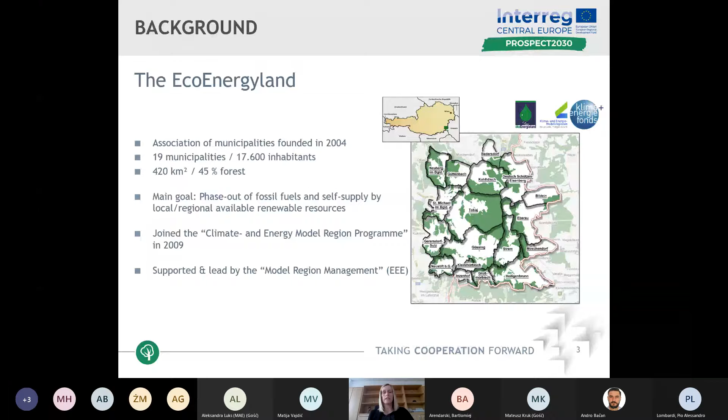Therefore, the municipalities also joined the so-called climate and energy model region program of the federal government in 2009, which enables them to have a finance basis for realizing some energy projects and also for the coordination of energy projects. And in this, we support the overall region and lead this as a model region management. And I am personally the model region manager. So I am coordinating all energy and energy efficiency related activities in those 19 municipalities.

What was our approach? Our approach was to divide the initiatives into three areas. So the municipal initiatives, the private initiatives, and the company initiatives. We saw the municipalities as a kind of role model, and we started with activities on municipal level, because there we have the most access, as we are coordinating all energy-related activities in our municipalities. Then we developed private initiatives, because we see the citizens as multipliers, and also company initiatives, because we see the company as a kind of, let's say, influencer, so that they want to boost their image by going green or using renewable energy resources for energy production.

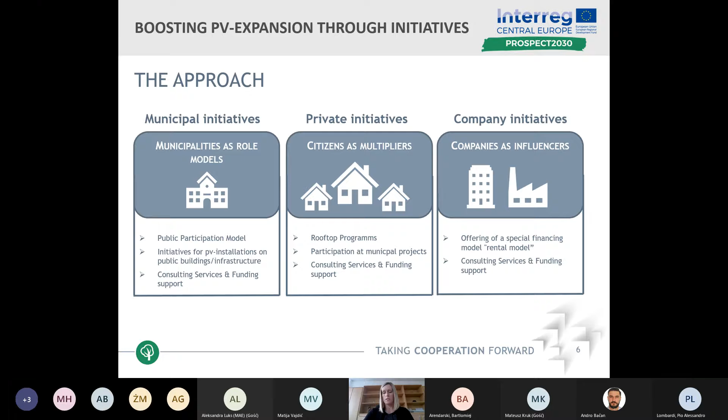On a company level, we developed a special financing model, a rental model, which I will also explain afterwards. And here again, we also offered consulting services and funding support. So now I want to go into a bit more detail on our municipal initiatives. This public participation model we have developed and realized.

So what was our idea behind it? The idea was that we wanted to create a new investment opportunity for citizens that promises a higher interest rate than the people would get on their bank passbook. We wanted to give private people the possibility to invest in renewable energy projects in their own municipality. For sure, we wanted to raise awareness in the field of photovoltaics. And we also wanted to enable our municipalities to realize PV plants without equity, so without the need to invest something from their own budget.

Okay, and how it works. The prerequisite for this model is to have a reasonable feed-in tariff available, so that you have a special period where you earn money selling green electricity from the PV plant. You need to have suitable public buildings for PV installation. You need somebody who is able to plan the PV plant and calculate the revenue and rates of return. And then you simply have to promote the possibility that citizens can invest in energy projects in their municipality.

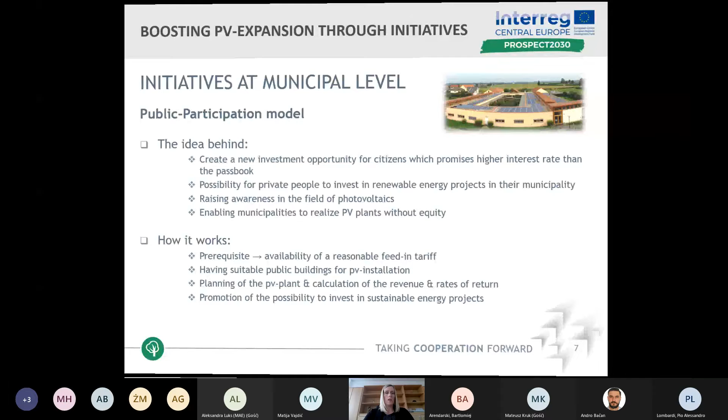How participation in this model works: the citizens of the municipality can participate by purchasing shares of the PV plant. We had the model that one share corresponds to about 1,000 euros. The participation on a legal basis was a kind of silent participation, which refers to the operation of the plant, and thus also to the profit and the loss, if there is some.

And the citizens had an annual profit advance of approximately 3 to 4%, which is much higher than they get at their bank. And after a period of 13 years, after the feed-in tariff ran out, they get the invested capital back. So it was a quite simple model. They can buy shares, then they receive 3 to 4% of their invested capital annually, and after the period of the feed-in tariff, they get their invested money back. And the plant goes directly into the ownership of the municipality.

So our model was quite successful. The result was that we realized public participation plants in 40%, nearly half, of the EcoEnergyland municipalities, with an overall capacity of 400 kilowatt peak. And the largest one, which you can see in the middle, has a size of 170 kilowatt peak and was built on a retirement and care center in the municipality of Strem.

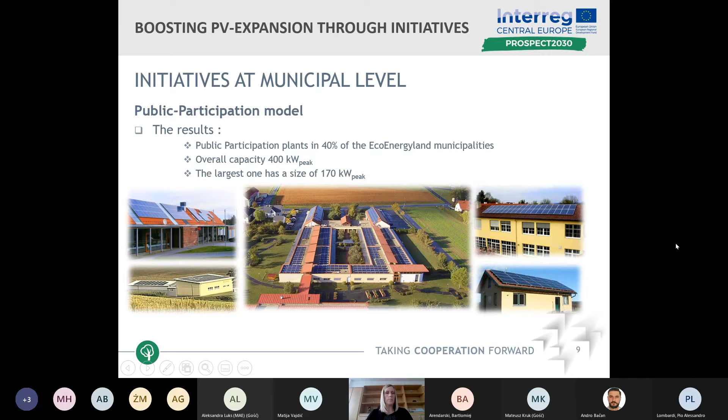Then the second initiative at municipal level was, on the one hand, again based on the public participation model. We said not only public buildings have potential for PV installation, but we also have other buildings and infrastructure in the public sector. We have biomass plants with rooftops, sewage sludge plants, pump stations, etc. And we wanted to promote the realization of PV plants on those buildings too. One model was, again, to offer this public participation model, which was already successful.

And the second model was that we discovered there is a possibility for municipalities to combine different funding, subsidies or grants. I think in 2013 or so, municipalities could get PV investment subsidies from the Austrian Climate and Energy Fund of 40% of the investment costs. And they could get investment allocation for such projects from the land government, Burgenland, with 50%. So overall they could receive grants of 90% of the investment costs. And this was again a booster for additional PV installations on public infrastructure.

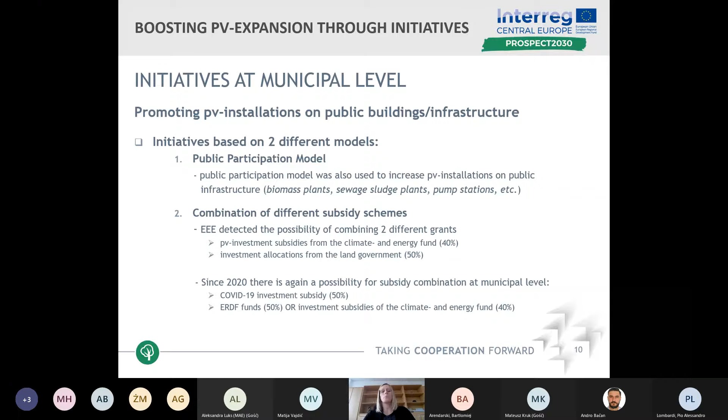And since 2020 we have a comparable situation again because of the COVID-19 crisis, because our municipalities get COVID-19 investment subsidies of 50% of the investment cost for such energy-related or efficiency projects. And there is also the possibility to apply for ERDF funds of 50% of the investment cost. So since 2020, municipalities can get their energy and efficiency projects 100% funded. Or if ERDF funds are no longer available, if the budget is used up, they can add a 40% subsidy from the Austrian Climate and Energy Fund to the COVID-19 investment subsidy. So they now have the possibility to get 100% or 90% of the investment costs.

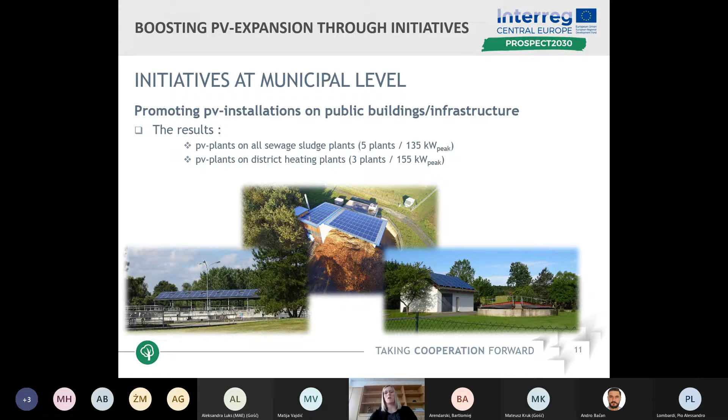What was the result of promoting those possibilities, let's say? We realized PV plants on all sewage sludge plants in our region. Overall, we have 5 plants and 135 kilowatt peak. And we have PV plants on 3 district heating plants with an overall capacity of 155 kilowatt peak. So this was mainly what we have done on municipal level.

Now I will come to what we have done on initiatives at private level. So we have developed a rooftop program, as I've already mentioned at the beginning. The idea behind it was that the companies in our region say, okay, people are increasingly buying different things on installments. They buy a washing machine on monthly rates, etc. So why not offer PV purchase on installment?

So we had the idea to create an offer for citizens to purchase PV plants for a monthly rate of about 50 euros. Okay, we say when we offer a PV plant, you get the PV plant and need to pay 50 euros for some years. We saw that this should be quite affordable for the people here. And it is more sympathetic for the people to pay 50 euros a month than to invest 7,000 or 8,000 euros into a plant.

So how this model works: we elaborated this installment purchase model, and we called it 50 rooftop program, because we thought, in a region with 19 municipalities, it should be possible to sell 50 PV plants. There we cooperated with a local installer and the regional bank, because for sure you need a bank that gives you the money for these plants. We decided on a plant size of 3.5 kilowatt peak. That should be a good size for a normal single family house, and we fixed the price for this size of plant with our installer.

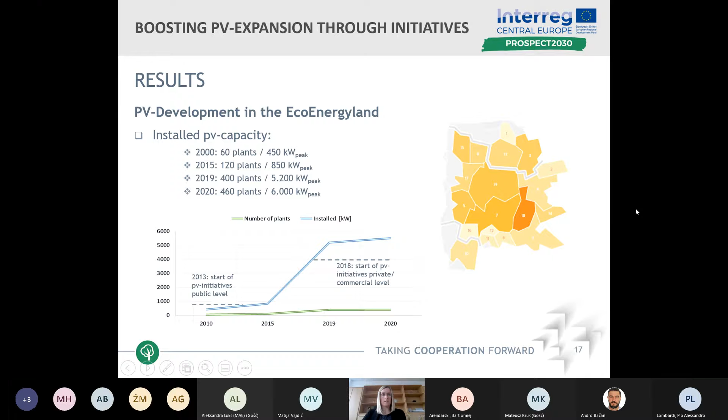So that was it from my side. I hope it was interesting for you what we've done at municipal, private and company level.

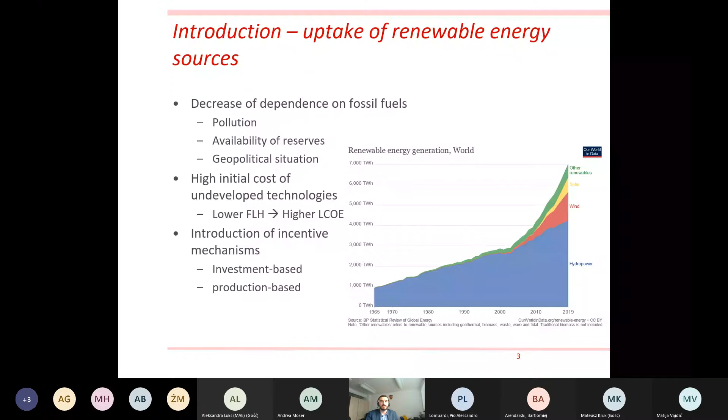However, at the beginning of development of this market was a big question: how we can promote these new, very costly technologies that were not yet very widely accepted. And not only were these technologies new, but they were very expensive to use. So we introduced two ways of incentive. One was investment based, and one is production based.

And so the easiest way to promote the production of electrical energy from renewable sources was the feed-in tariffs. We all know that feed-in tariffs worked well in a number of states. They were first introduced in Germany, and the feed-in tariffs gave, I would say, wind to the market, the development of renewables.

So this is, as you all know, production-based subsidies, where every producer gets a guaranteed fixed price for their electricity produced in the plant. Not only is the price guaranteed and fixed, the producer in this model has guaranteed access to the grid, which means that all produced electricity must be taken over by the grid, and these power purchase agreements are very long. They typically range from 15 to 25 years, which is actually the lifespan of some RES plant, if we are talking about the wind farm or photovoltaic system.

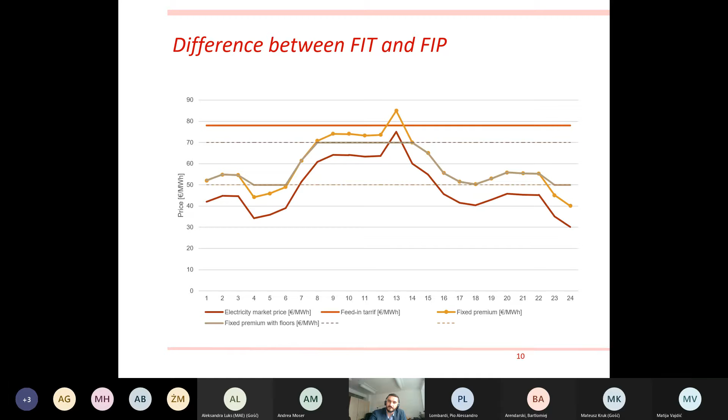I mentioned auctions. Auctions or tenders are tenders for the award of the premium, where most of the RES project developers bid with their wanted price of electricity. This is a pay-as-bid system, for example, where the developers place their bid for electricity price or for the premium, depending on the market. So in this case,

developers have two goals. One is to be in this cap where they will actually receive the premium, so they wouldn't go with some high or unrealistic level of premiums, but they also want to have their project profitable. So they bid with their electricity price, and depending on the cap, which is defined by, for example, the market operator or by the government, once the total bids are sorted from the lowest to highest, and depending on the cap, sometimes in terms of megawatts of installed capacity, or in terms of plant energy production, they are awarded that premium.

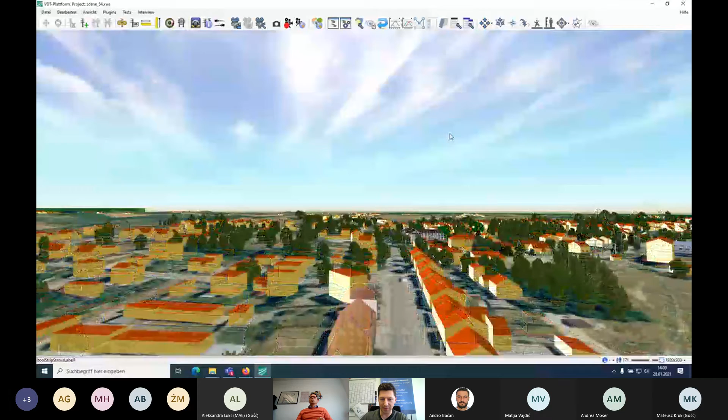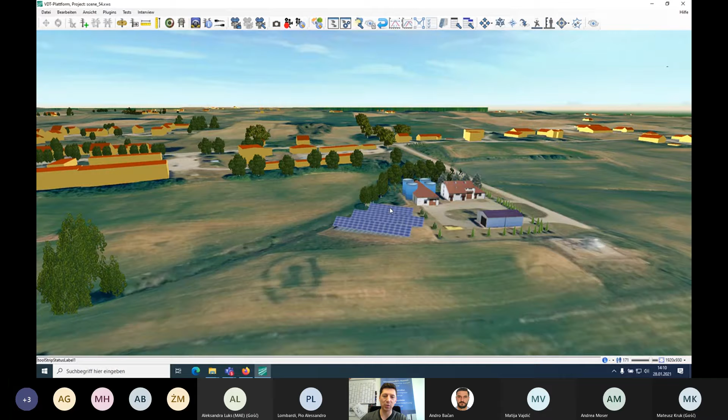The practical implementation of the project took place actually here. There was a microgrid built in the sewage treatment plant. So they already have the PV photovoltaic panels which support this plant. However, we were able to install the storage. There was already the diesel generator as a reserve unit and the whole control and monitoring system. The company from Białystok, Electrum, developed the EMAX. It's an energy monitoring and control system, and we were able to run this small microgrid even in island mode, and also in synchronized mode to the grid. And we tested several use cases and scenarios on how to optimally integrate the renewables in order to support the process.

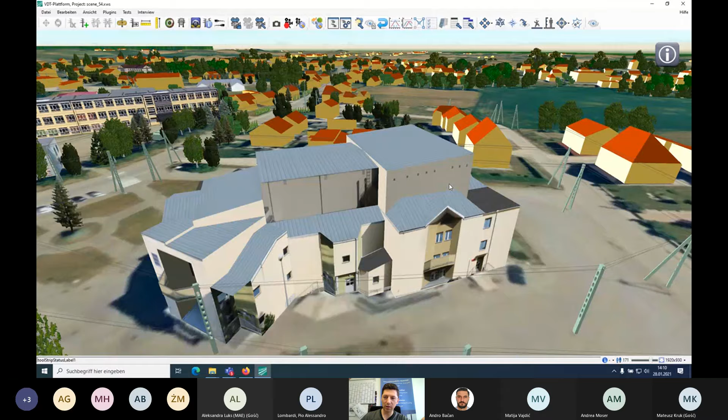But in this case here, the issue is more related to the planning of the new components of such a microgrid. So we start with small, simple use cases, like for example, PV planning. So there are the PVs which are already installed or which are going to be installed pretty soon in Puńsk, the small PV plants on the buildings of the school and of the cultural house. You can see them. We connect this tool with another tool, which makes the economic calculation of such investment. So you can see here an interactive tool, technology, solar. You have the levelized unit cost. You have some parameters which are calculated there.

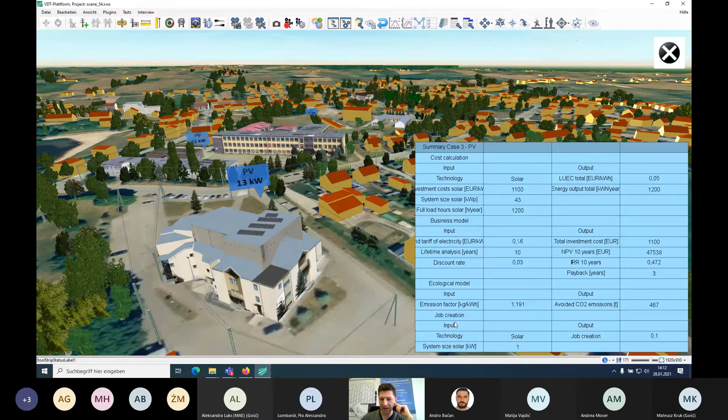So we took the investment costs which are related to this region. We took also some weather conditions which are related to this region. So you can calculate the business model for this kind of investment, but also you can calculate, for example, what kind of environmental impact these investments will bring you. So how much emissions you can reduce, or even up to the job creation calculation. So if you install many PVs and many wind farms in this region, they need to have service teams and so on. So maybe you will even create jobs in the region, and you will keep the young people in the region.

We cooperate very closely with the city of Dardesheim, which is located not far from Magdeburg in the Harz region, and they are called the City of Renewable Energies. So they already have a lot of PV and wind.

So on many days in the year they are 100% renewable and even exporting a lot to the neighbor regions. So that's why this good experience and knowledge we were trying to transfer and try in the other regions. Okay, let me show you some more planning scenarios.

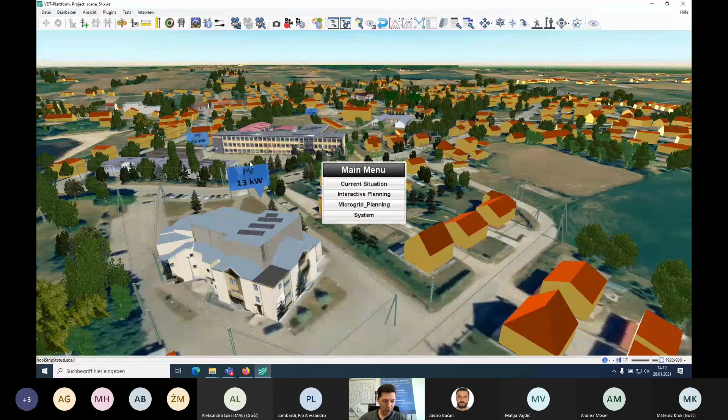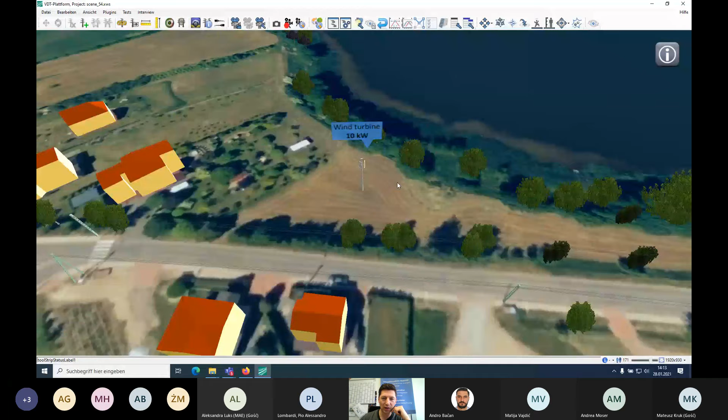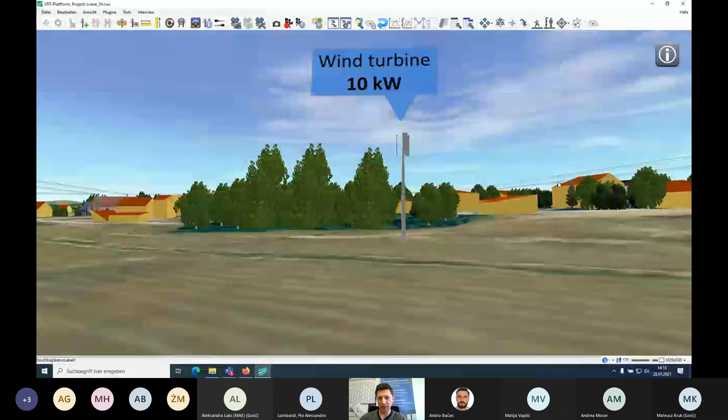So we also plan some small wind turbines directly inside the city, vertical and horizontal wind turbines of 10 kilowatt installed power. We were making some tests for sound effects of these wind turbines. You can see here also different types of wind turbines which can be tested. This is the interactive tool, as I mentioned.

So you can see here that we are able to make some measurements, for example a distance measurement, in order to have a discussion with the people who said, okay, this windmill is too close to my property, I don't like it, or I'm afraid about it. So we can visualize this. We can also make some visibility tests in order to see if this wind turbine, for example, will be seen from my garden. So you can see this is not the case.

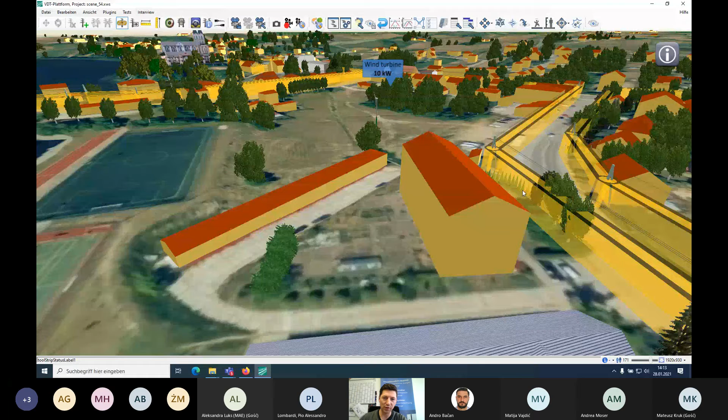We have therefore developed some kind of tool, so we can make a visibility test for all the components in the area. So there are some low voltage overhead lines and medium voltage overhead lines which are then installed. So you can make some visibility tests for that. But you can also make some visibility tests for the individuals.

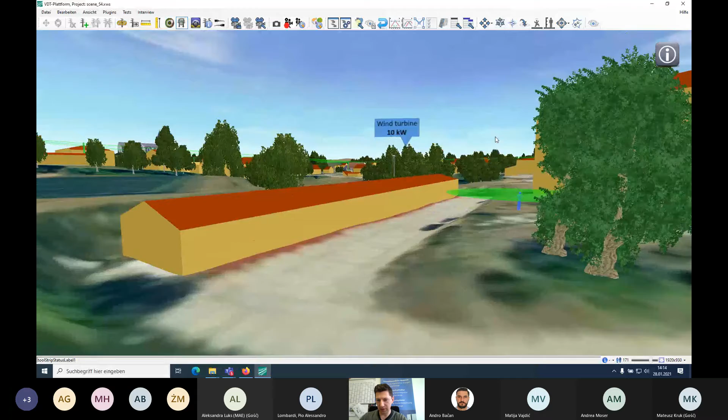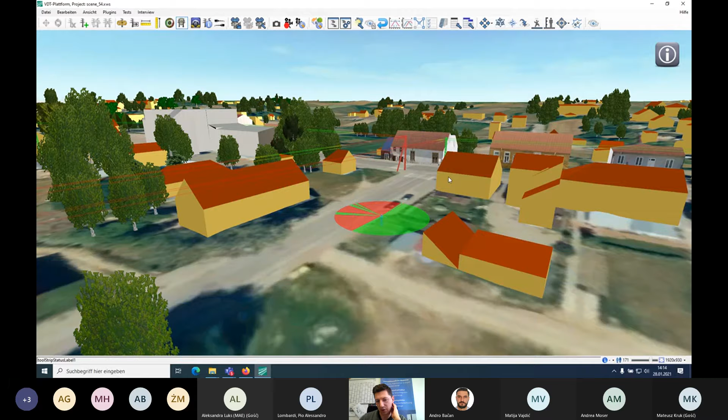Let's say that you are interested from this garden. I will have some visibility, so you can see this is not visible from the perspective of 1.80 m. But if I, for example, move closer to the infrastructure, for example here, then I will see this electrical infrastructure, and then there's a point for discussion if it's okay for me, or if I have something against that, and I can improve the scenario.

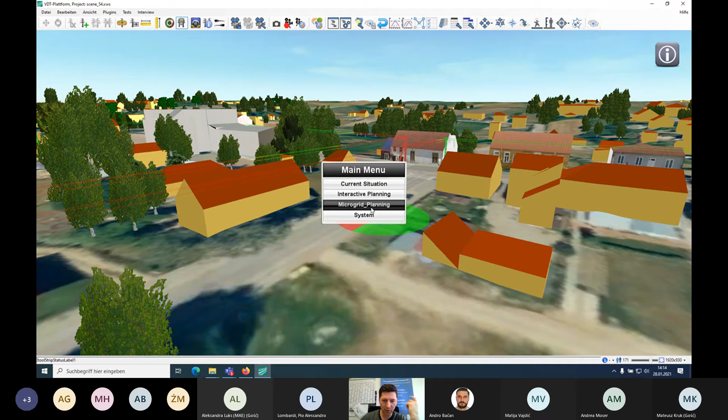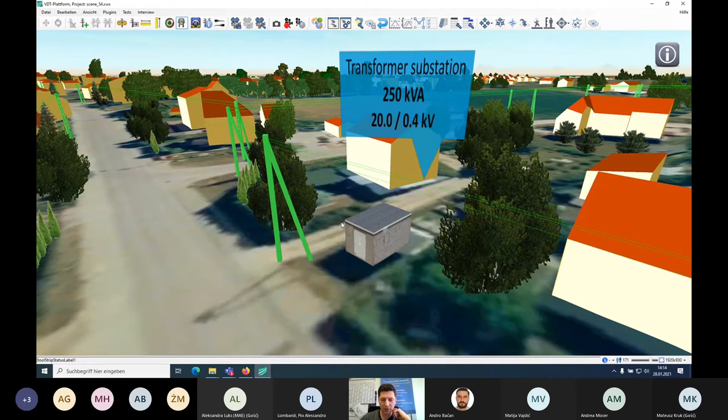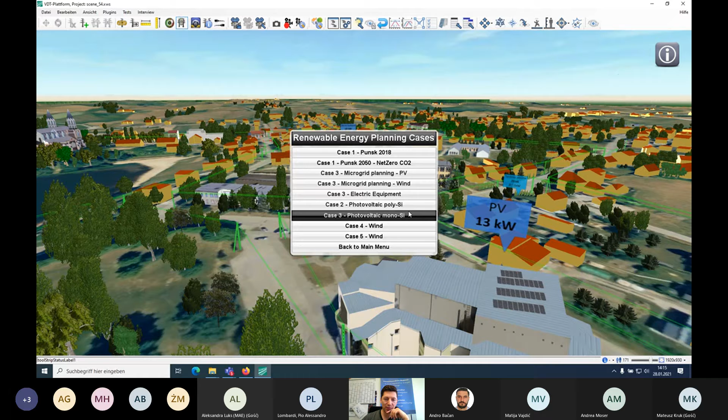Furthermore, we have, Pio will give a background for that, some very futuristic scenarios. So 2050 for Punsk, a so-called net zero CO2 village. So therefore we will need a bigger plant, like a 1.4 megawatt PV plant and another one of 600 kilowatt, and 2 windmills, altogether 5.2 megawatt.

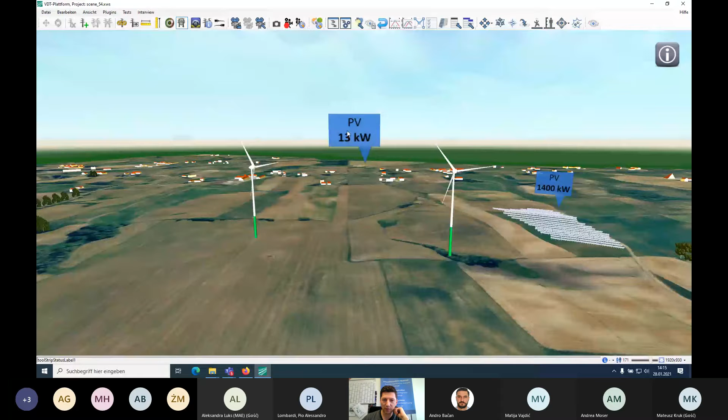So as you can see, we have here the possibility to create the visual scenario of the upcoming electrical infrastructure. Also, we consider some thermal issues, also mobility, electric vehicles. You can incorporate here the location of the charging station and so on, in order to simulate this kind of scenario and to test the acceptance of the inhabitants for the upcoming infrastructure.

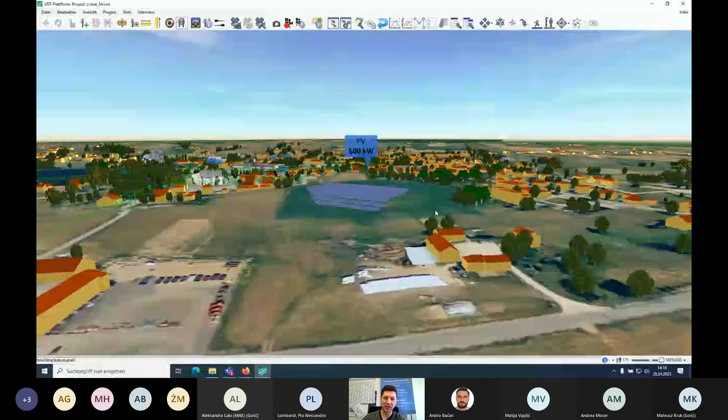I will show you how it works in the way of interactive action. We can put here, let's say, a big windmill. Let's say this kind, for example, and you can see this is for sure too close and this is too massive. So imagine if you lived in this house, what would be the impact of this windmill on you? It will be dramatic. That's why probably it will not be accepted. So let's move this windmill a little farther.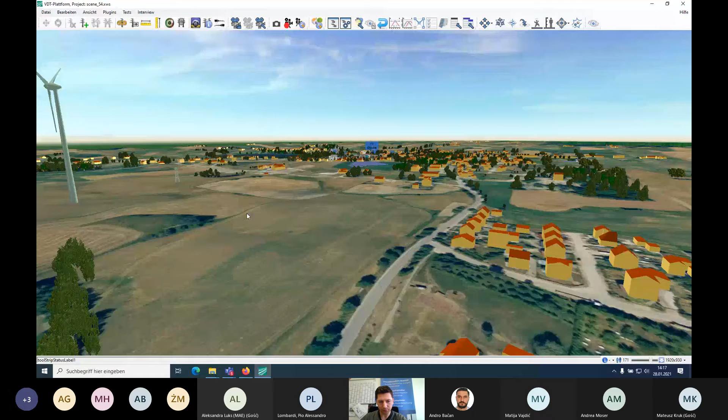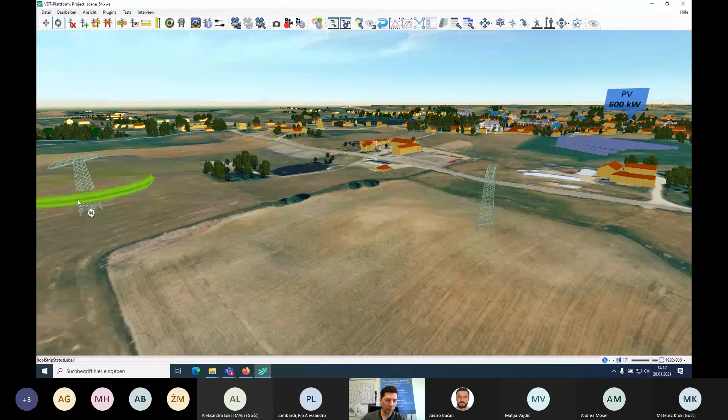Let's show some example of interactivity of this tool. So let's build some overhead line of the higher voltage level. Very quickly, I can show you this is not only for the decision makers or investors in the region, but could be also for some technicians as a support or in order to make some plannings. So we were trying to incorporate as many functions as possible in this tool.

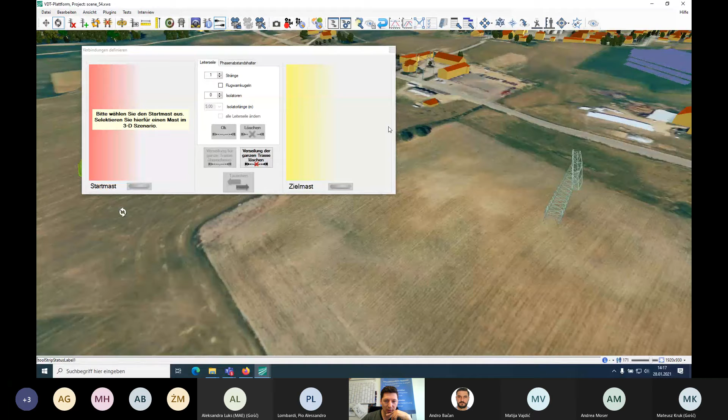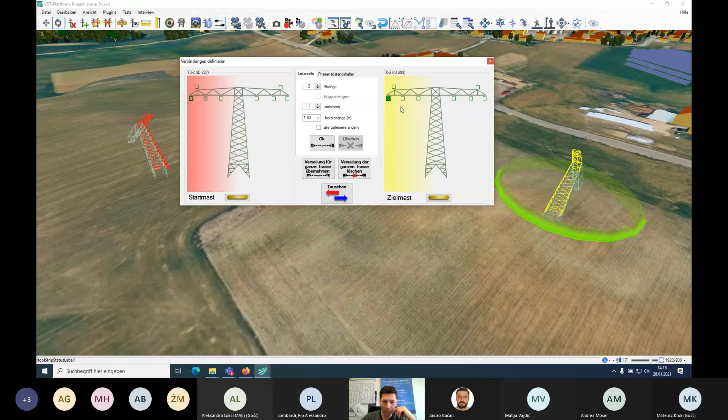So you see there are 2 towers. Then we can choose the towers in order to wire the towers, for example, 2 strings, isolator. Yes, and then let's see how it's going to look in practice. So of course this needs some time. Normally the engineers are doing it before they go to discuss the concept with the interested or involved parties.

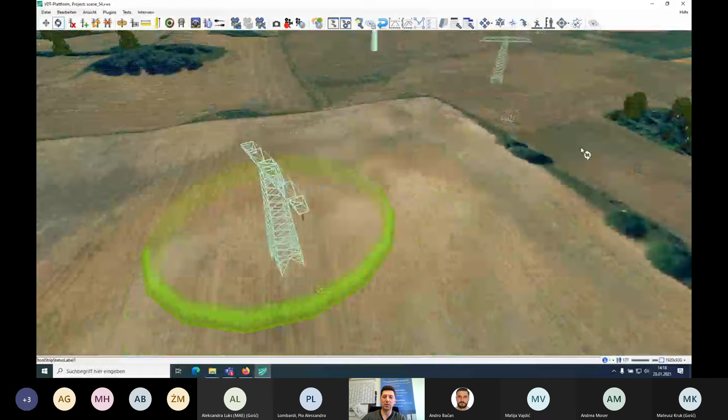So you can see we have now these lines. You can see interactively that when we have some discussion, for example, if it's going to be visible from this house, which is obvious that it's going to be visible, we can make this visibility test again.

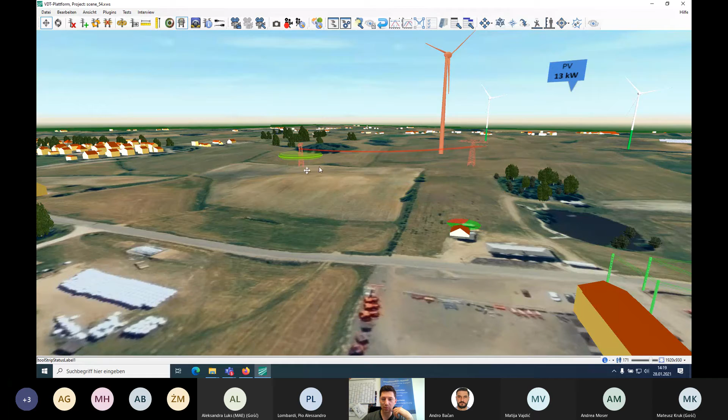So you see, all these components are visible in this case, but of course we can test several variants. We can move this tower a little bit farther, and so on. We can also put some vegetation here, some trees and so on, in order to make the power line not visible.

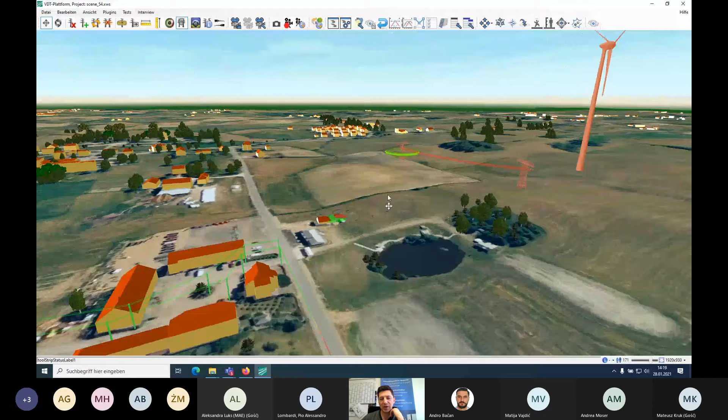And this allows us first to evaluate the technical scenario from the other perspective, so from the acceptance perspective, or also from the economic perspective. As you can see, we connect this with some calculation tools for the economic business model calculation, and we are able to incorporate these functions in the other interested regions.

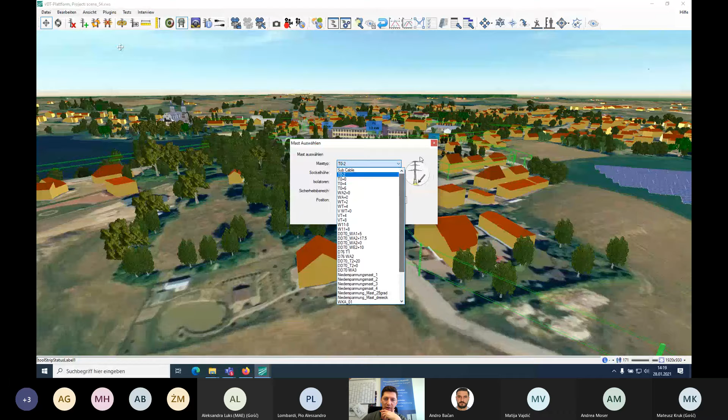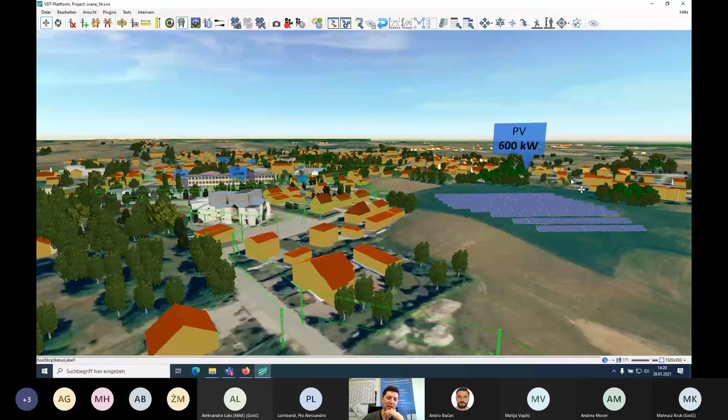Several other components can be installed here. So we have a library of several components which can be installed here and tested if they fit to the infrastructure, and give the feedback to the investors, to the technicians, to the citizens, and to the parties involved.

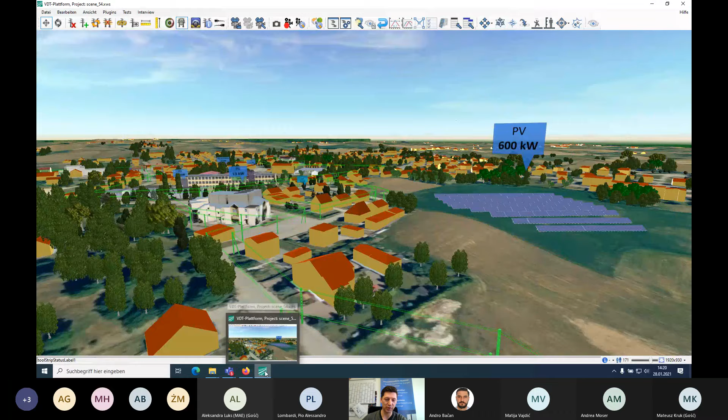Thank you, Bartolome. Maybe Pio, can you test it one more time? If it doesn't work, then I will do it. It does not work. I don't know why. Please. I will share it. Just a second to find the right presentation, because now I don't see it as well. Maybe there are some questions for Bartolome until I start. Okay, should work now. Number 3. So this should be the one. Yes. It's full screen. So thank you, Matija, that you could solve the problem. I don't know why, but it does not work from my laptop.

So this part is an introduction on what Bartolomeo has shown before. Namely, we have done a European project in which we have developed a digital tool for planning residential infrastructures from all points of view which concern energy. Therefore, we have a multi-criteria planning, which means that we have considered the technical aspects, the economic aspect, the social aspect, and the environment aspect.

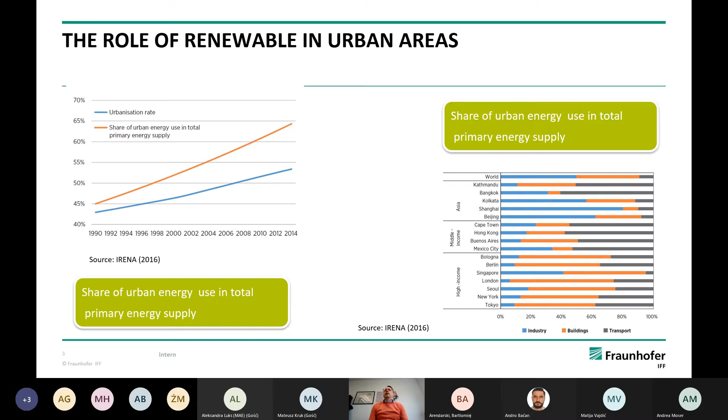If you look at the picture on the right, you see that the distribution of energy consumption changes from region to region, from city to city. There are cities like Bangkok, for example, in which most energy is consumed for transportation. It is a mega city, so a lot of people live in this city. There are other cities like Berlin, in which the energy for buildings, mostly for heating, is the most relevant energy demand.

If you go to slide number 4, there are some predictions for 2030. These predictions have been done by IRENA. Maybe you know the agency IRENA. They've compared different city infrastructures located in hot climates and in cold climates, classified as developing city or established city, and further in low population density and high population density.

So you see that there are 4 energy demands depicted in different colors: heat, cooling, electricity, and transportation. For example, for the cold climate regions, the energy for heating is the most relevant energy consumption, which accounts for about 90% of consumption. For high population density, transportation also impacts the final consumption.

It is also for hot climate, and in which you see that for hot climate, the energy for heating is very marginal. In that case, the energy for cooling is more relevant. So this just depicts how the energy is distributed depending on where your city or village is located.

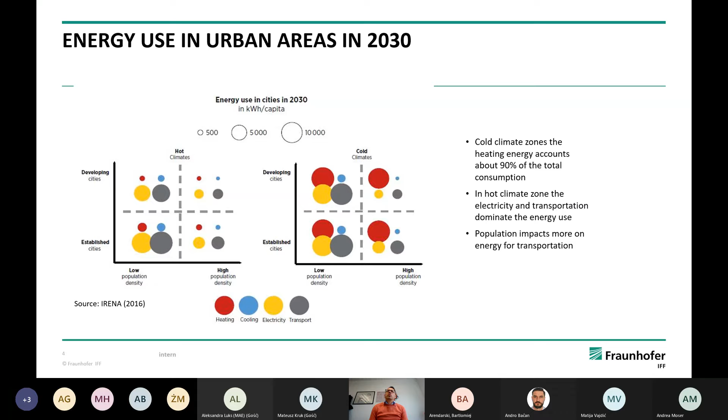Can you go to slide 5, please? So what we have done, we have developed a holistic approach, a holistic methodology, aiming to plan the urban infrastructure of the future, we think. So you know that in the future we will produce most of our energy in the form of electricity. And the idea is to electrify what today is not yet electrified, which means to electrify the heating sector, to electrify the mobility sector, and so on.

So we have generation of electricity, which is done in an alternative volatile way, and we want to supply using renewables like wind, like photovoltaic, all the energy consumption in the urban system. Of course, for doing that, you have to have a holistic approach. You have to consider a multi-energy system, because the electricity will be converted into other energy forms like mobility, like light, like heat, like cooling. And this is the background that is inside the tool that Bartolomeo presented before.

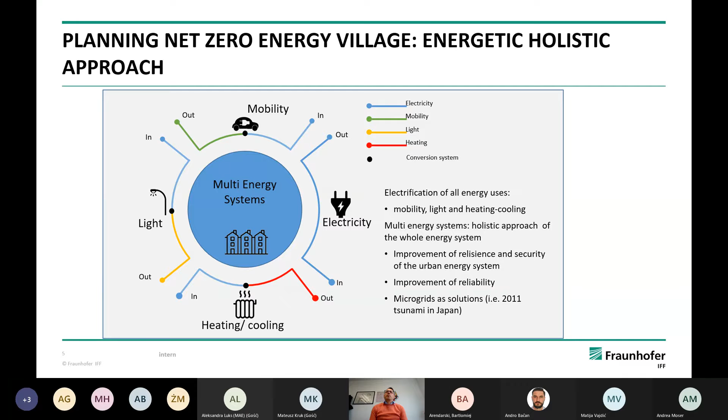And from the technical point of view, we try to do it in the form of a microgrid system, so a multi-energy microgrid system, which also contributes to improve the resilience of the system in case of blackouts or in case of natural events. To slide 6, please.

So in order to do that, as a first step, we have evaluated the energy demanded from the building, both in the electric form as well as in a thermal form. To do that, we consider the building geometry and the building typology. It depends if the building is for a school, is for a house, or is for, I don't know, a hospital, restaurant, and so on.

After that, all the buildings that we have modeled also have features modeled concerning the insulation property and the specific consumption of electricity. There are some standard values which depict how much electricity can be expected to be consumed if the building works as a hospital, if the building works as, I don't know, a research center. Of course, the standard or statistical way may be used if you don't have metered data. In case you have metered data, then you can use better data for modeling your system.

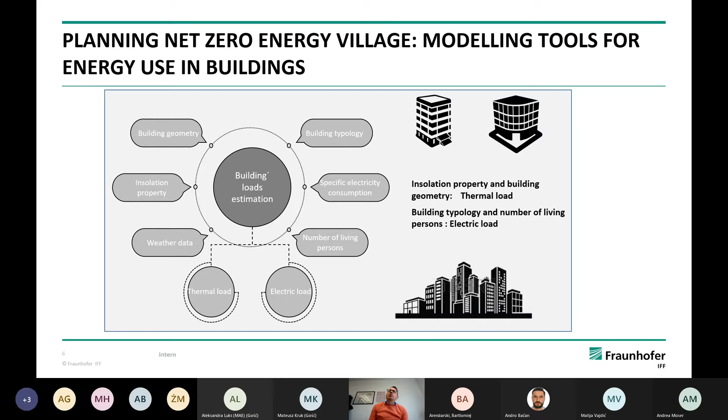Then, of course, we have to consider the weather conditions, which mostly affect the thermal load, and we need to consider also how many persons live in the building or work in the building. So using all these inputs, the tool that we have developed allows us to perform the calculation of thermal energy and electric energy. Can you go to slide number 7?

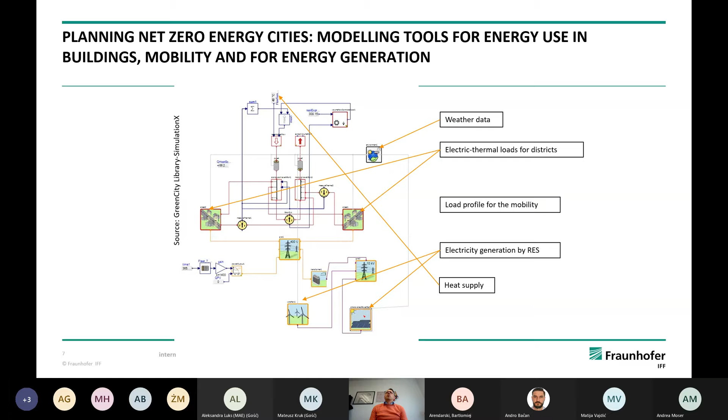I cannot move the mouse, but on the left bottom, there's a triangle. You see that is the representation of the mobility, which we have done using a matrix. And the blue line on the top of the picture depicts the district heating system. So we have done here three sectors: heating, electric, and transportation. And for that, all these objects have been modeled and parameterized. Can you go to slide number 8?

So, as I said before, we have evaluated the scenario of Punsk 2050 as a net zero energy system, which in this case means that the energy for heating, electricity, and transportation that Punsk will consume by 2050 should be locally generated using renewable energy, mostly the technology of wind turbines and photovoltaic. So this is a diagram of Punsk 2050. Can you go to slide number 9, please?

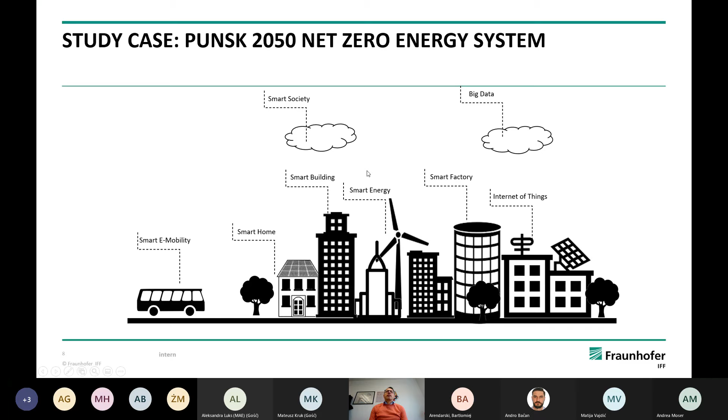So the village today has 2 schools, education buildings, 250 residential buildings, 9 farms, and 2 offices. You see the annual specific electric consumption, which comes from statistical data. I repeat, we could not meter.

But we got feedback there. This specific consumption is quite good as an assumption, and we have also given the number of persons who live in the building, the average number.

Then on the right part, you see a simulated electric consumption for supplying 17 electric cars. So together with the Punsk population, we suppose that in 2050 we have 17 electric cars, and for that we have done a simulation of how much power will be consumed.

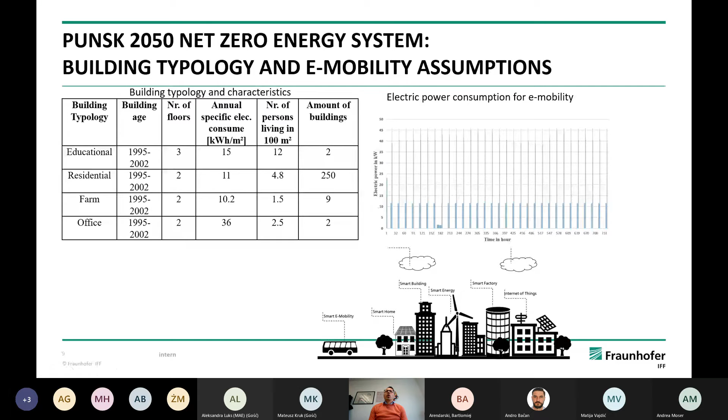On the next slide, you will see how the thermal demand will be supplied. We're supposed to supply the thermal energy using heat pumps, air to water heat pumps. You see in the table the characteristics of the considered heat pump. Since it is an air to water heat pump, the air temperature in which the heat pump works is very important. And for the Punsk climate conditions, you see that the temperatures are not very warm.

So we have a minimal temperature of about -20 and a high temperature of about 29.9 Celsius degrees, with an average of 7.2 Celsius degrees. Considering these conditions, which are metered data, we have calculated the COP, the coefficient of performance of this model of heat pump. You see that in that case the COP works with an average value of about 3.5, which means that you need 1 kilowatt-hour for producing 3.5 kilowatt-hours of heat at low enthalpy, as you see on the table on the left, which is enough to supply the heating district which we have considered.

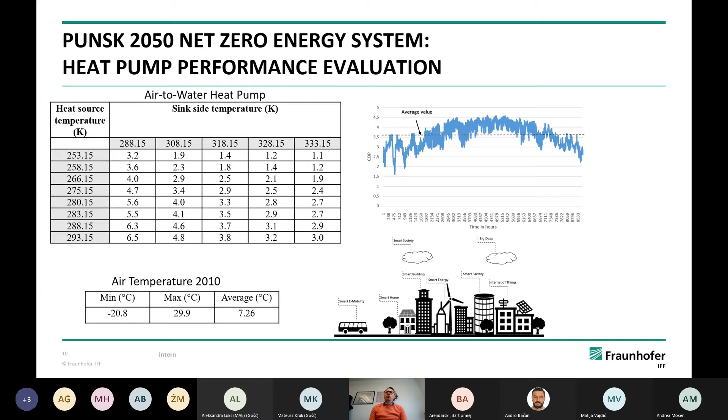If you go on the next slide, we have analyzed how the energy demand is distributed during the year. And of course, you see that during the winter time, the energy consumed is higher than in the summertime. And you see that the heat demand is the most demanded energy for the village.

On the table on the right, you see what we have calculated as numbers, and how much power we need to consider that the system will demand. So for the residential sector, it will be about 1.2 megawatt. For the thermal sector, 2.8 megawatt electric, because it is a heat pump, and for transportation about 460 kilowatt.

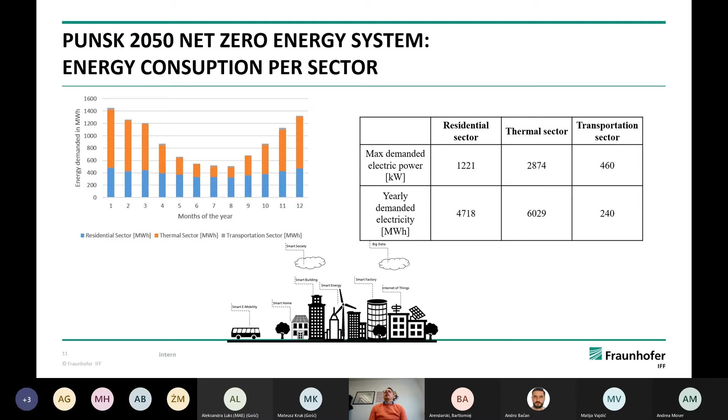If you go to slide number 12, you will see the technical and economic indicators that we have considered to evaluate if the system works well or not. So we had the system self-consumption index and the system self-sufficiency index. These two indicators help the designer, the engineer, to understand which technology is the best one from the point of view of the system operator.

I mean, the technology which allows you to have the highest system self-consumption index is the one in which the generation and the consumption match. So the higher this index, the higher the matching between generation and consumption. On the right part, you have the economic indicators like net present value, internal rate of return, and the levelized unit cost, which Bartolomeo Pazzalia has already shown.

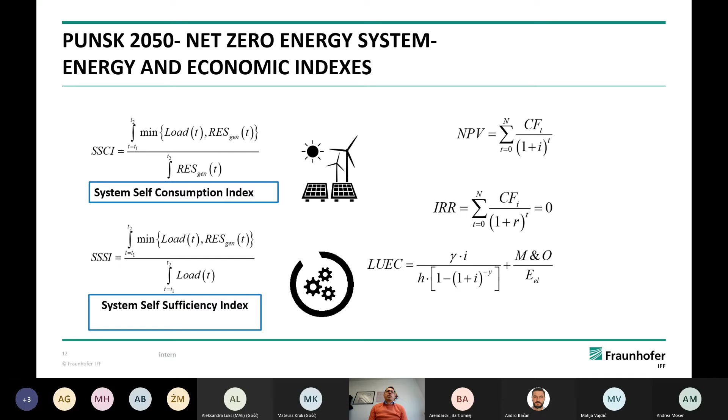So the results are depicted in slide number 13. You see that we consider two technologies for electricity generation, namely wind and photovoltaic; wind is on the bottom and photovoltaic on the top of this diagram. Supposing that we want to supply the system only using photovoltaic, it means that wind turbine is 0, and we need to install about 11 megawatt of photovoltaic.

Using only photovoltaic, the matching between generation and demand will be something like 7%. So the self-consumption index is 7%. It means that you need to store 93% of the energy that you are generating, using a heat storage system maybe, or using battery, and this part of energy should be supplied when the system is demanding.

If you increase the generation of wind turbine, supposing that now you want to have wind turbine, it is enough to have 5 megawatt and about 2 megawatt of photovoltaic. For this combination, you supply the generation of Punsk, and you have a matching effect of about 20%, which is the highest value that we can reach with this climate condition in Punsk.

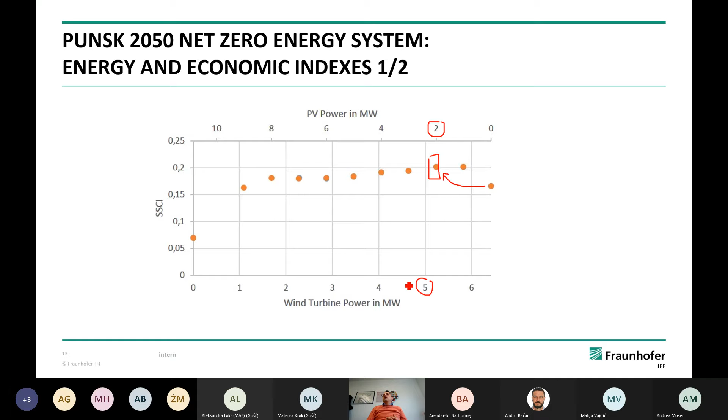But as we have seen on the slide before, it is not the best one from the system operator, because we integrate 16% of the energy, and if we add, for example, 2 megawatt of photovoltaic and 5 megawatt of wind, we integrate about 20%. So this will affect the dimension of storage system that you may need if you want to operate Punsk as net zero. If you go on to slide number 15, which should be the last one.

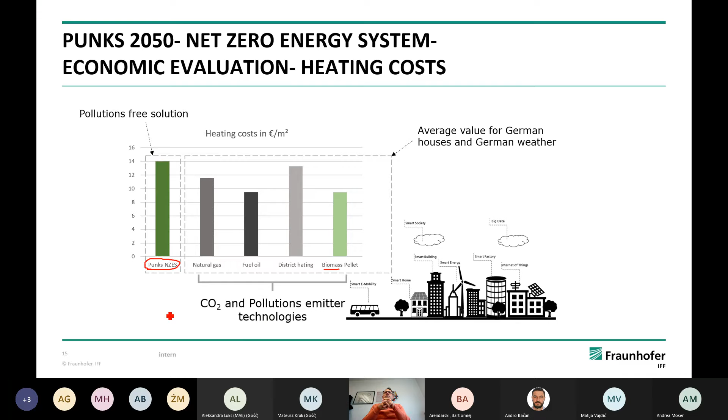Yes, and then comes the tool that Bartłomiej has already shown. Sorry for the 10 minutes more that I needed to show you the presentation. I hope that you could understand, and if you have any question, me and Bartłomiej will be happy to explain.

Thank you both for the interesting presentation. Maybe at the end we can ask whether there are some questions. And now we can continue with Mr. Mateusz Kruk from Mazovia Energy Agency to present what's happening in this field in Poland. So maybe I will share my screen. Wait a second. Do you see my screen? Yes, it works. You can put it as full screen, maybe. Okay. Thank you very much.

As I was introduced, my name is Mateusz Kruk, and I'm from Mazovia Energy Agency. Today I will present cyclical promotion activities of renewable energy sources and energy efficiency, carried out by MAE targeted at municipalities. The whole expertise MAE has, directed to local entities and municipalities, we can divide into 4 divisions: financial assistance, energy assistance, energy management, and promotion and education.